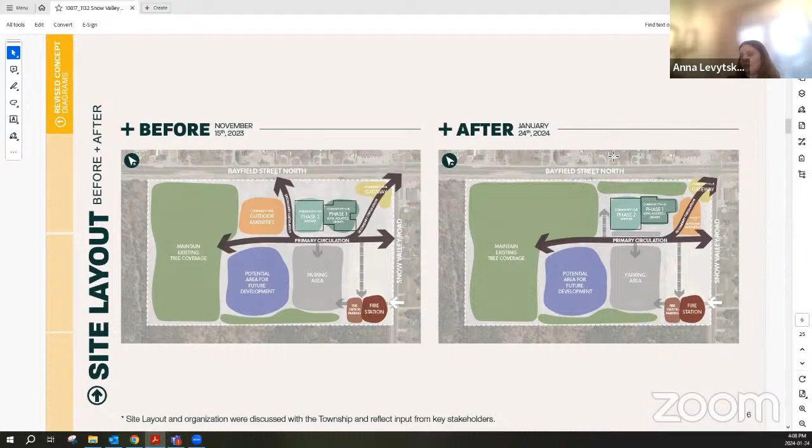Now focusing in a bit more on the building itself. The previous design is on the left again, and the revised design on the right. There is some shifting of major uses -- you can see the overall building footprint has shrunk a little bit. Of the major uses and facilities within the site, we've located the gym and aquatics now towards the north side of the site, including change rooms between both uses, since last time it was a little bit more disconnected.

This time also focusing the library on the south side, still including the multi-purpose space, and then relocating the cafe more towards the periphery, so there is potential access from the street level, from the outside.

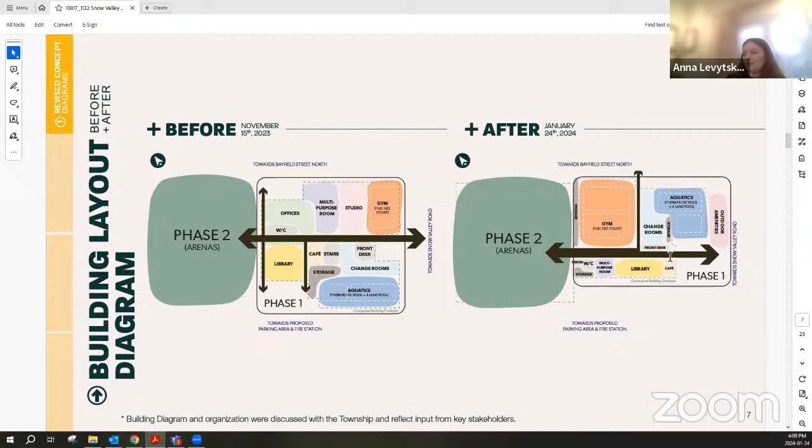Okay, thank you Anna. We thought it would be a good touch point to speak to the potential estimated building costs of the previous scheme and the current scheme. We've kept the same line items for consultants, contingency, the splash pad, and the outdoor amenities.

But we've identified potential savings in the building costs for phase one especially. In the previous version, it was just over 87,000 square feet for phase one, but due to efficiencies in the detail, we were able to reduce that by just under 15,000 square feet, resulting in significant savings from over $64 million down to $53 million proposed.

And if you wrap that back up with all of the consultant fees and everything else, there is just over an $11 million saving on that.

So on phase 2A and 2B, the arenas and rinks, we did increase the size slightly to incorporate extra mechanical room and Zamboni storage and items like that. But the quantity of that space will be detailed by the mechanical engineering team in the future to really understand exactly what the Zamboni needs for interior storage, exterior storage, and all those types of details.

So these are the working numbers that we've tried to do. The benefit of the detailed design is we're able to really drill down on the space configurations of the design itself. Anna, can you go to the next slide please?

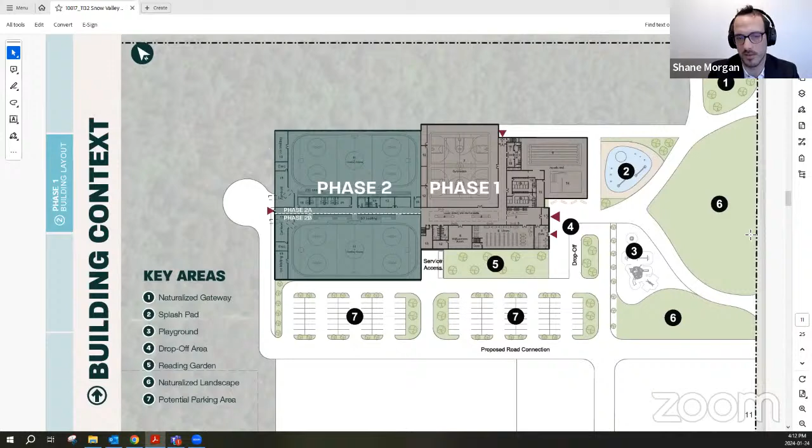So phase 2A would be the larger of the two rinks, with approximately 200 seats, with the change rooms and the access. Phase 2B would be the approximately 50-seater supporting arena on the south side. All of the change rooms and supporting services would be built as part of phase 2A, and that would be able to tie on afterwards.

Next slide please. So to get a bit more of the zoomed-in details that I'm speaking to, we've really worked to tighten up each of those. The next slides will speak to the various areas and costs broken down by grouping.

I know those preferences from councillors to really get into the details on the sizing and cost allocation to each of those services. So as you can see, the number 1 beside the word legend would be that main access point, closer to the parking, closer to the intersection as you come in.

And then you walk in, there's the reception, and off of that is the cafe and library. The cafe has the exterior facing area as well. Depending on hours and services, there's the opportunity for that to operate separately, depending on the requirements that would be there.

The library was maintained as a 2-story structure, so there is an internal stairwell in the library to provide contained access in there, and obviously various services.

Going east to west, there's the multi-purpose room, washrooms, and services space, then the local history and memorabilia. Above that there is a walkway around it, but it'd be a skylight above that to show the very generous space with lots of light.

And then the north-south access would provide access to the gymnasium, the change rooms for both the gymnasium and independent change rooms for the aquatics hall, and then that would spill through. Next slide, please.

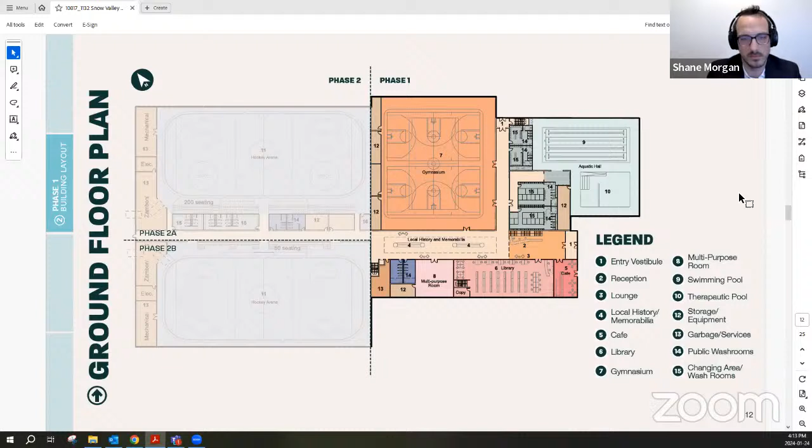And then this is the mezzanine space. So the cafe, aquatics, the first entranceway of the lobby, and the gymnasium are all double height spaces along with the arenas. So everything that is colored is effectively what is usable space on the mezzanine.

So the purple area in the top right is the proposed office area for staff in the facility to work on that. Obviously open to discuss the exact requirements with staff on how many they anticipate, with supporting mechanical for the aquatics.

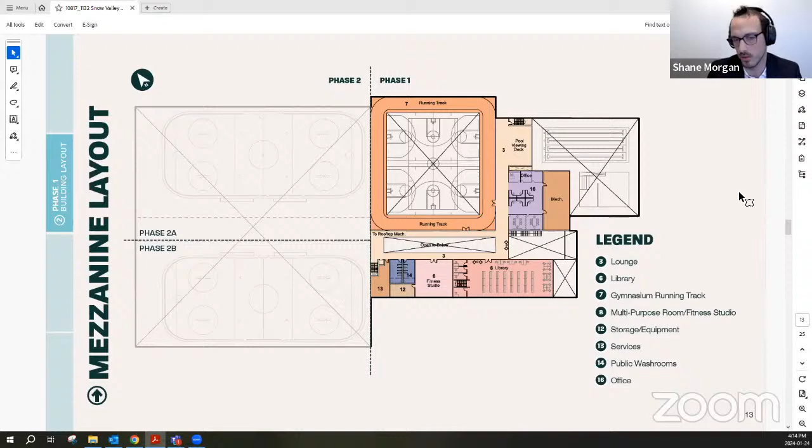Then there is a running track that would be on the mezzanine level above the gymnasium, but obviously not interfering with the clear height space required for the sports facility itself. And then on the south side, the second level of the library with some reading rooms, fitness studio, then the storage, washrooms and services along with that as well.

Next slide, please. So the aquatic hall is the 4-lane, 25 meters with the separate therapeutic pool. So the number is 15 in the bottom left, and the 14. So there's showers, change rooms, storage lockers and everything. So you come in, change there, go through the showers, and service that hall.

So the estimated size of the aquatics facility is just over 13,000 square feet, which would be based on our $740 per square foot valuation, would be $9.6 million. And then the programming breakdown of the aquatics hall itself would be 6.8 for the hall, change rooms and bathrooms 1.8, and then storage equipment 446,000, circulation 509,000 to supplement that.

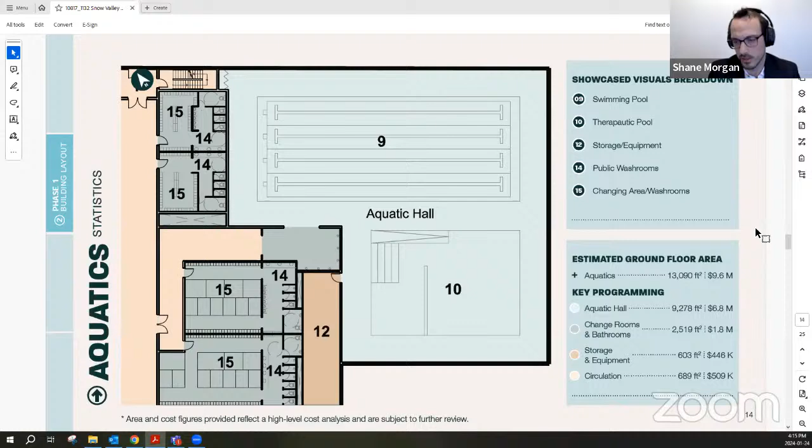Next slide, please. These were just some of the precedents that we utilized in some of the previous examples, just for reference.

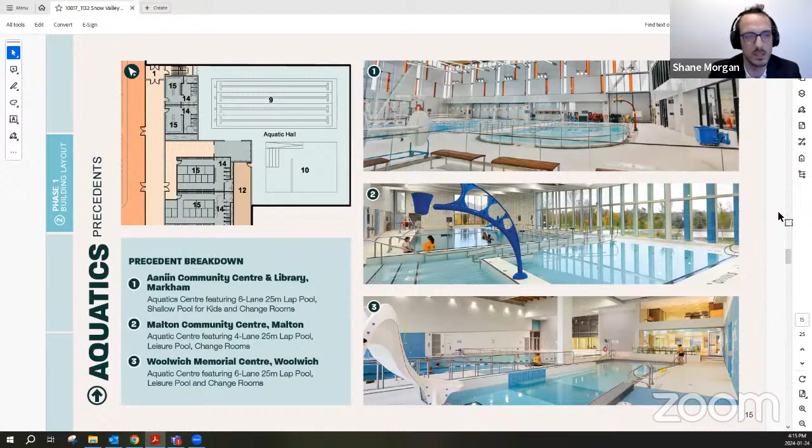Next slide, please. And then the gymnasium. Once again, so the total area of this facility would be 18,665 square feet, bringing the valuation to 13.8 million. So that has, and then the running track on top of the perimeter.

So on the west side here, where number 12 is, that is inset storage, obviously the various needs of a gymnasium for, be it balls or whatever else is going to be handled here, with the running track inset above that.

Supplemental cost there of 5.6, and then the court area, change rooms and washrooms. So in the top right of this image, the 15 and 14 there, the supplemental change rooms for the gymnasium, and then we have obviously the storage on the western side.

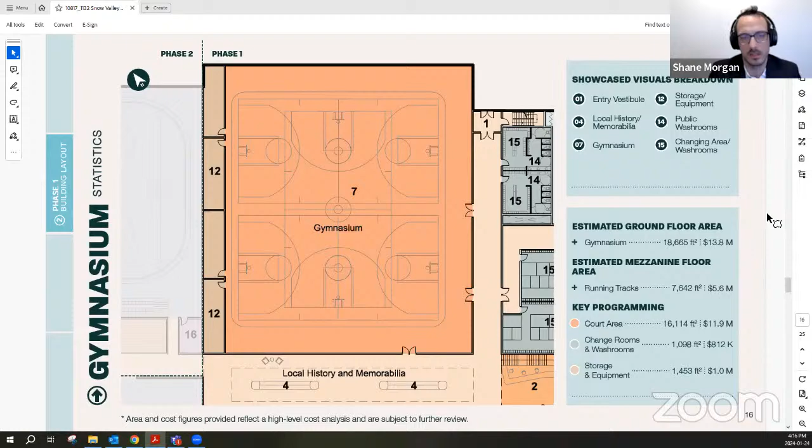Next slide, please. Let's get the various precedents of that, and then the final grouping. So, and then focusing just on the reception, cafe, library. So as you can see, you enter number 1, cafe is over there, and then the reception and local history, memorabilia, and library and multi-purpose.

So this one obviously showcases primarily the library would be just over 8,000 square feet, with a combined cost of 2.9 million essentially per floor, since it is duplicated on both. So that would be the 5.8 million on that.

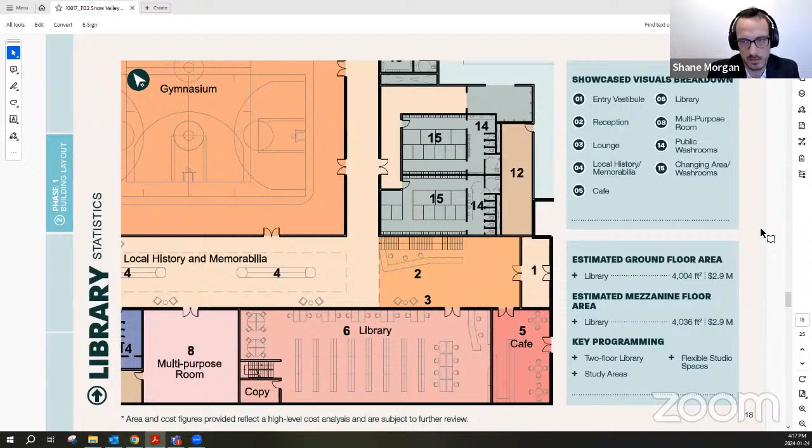So next slide, please. Once again, the various precedents of the kind of library style and kind of facilities that we would envisage there.

And then so onto the arena. So obviously in the central area, you've got the circulation space spilling out from that main circulation. So variety of change rooms, team rooms, public washrooms to supplement. They could be modified to more changing rooms if necessary. There's some storage and equipment, and an office if necessary.

So the full feasibility breakdown of those we'd anticipate we'd go through a needs assessment at a future phase, but this is the kind of supporting bar in that central space to allow access then from there into both of the arenas, with mechanical, electrical, and Zamboni storage on the west side.

So the phase 2A, so there's a dashed line along the corridor in the center. Thank you, Anna. Which would be the demising line, which would mean the total area given over to phase 2A would be 33,357 square feet.

For a total cost of 24.6 million, and then the phase 2B obviously would be a smaller arena, and you have the benefit of not needing to build additional circulation space due to the layout. So that would come in at 25,984 square feet with 19.2 million, and then just the kind of separate breakdown of per use on each of those.

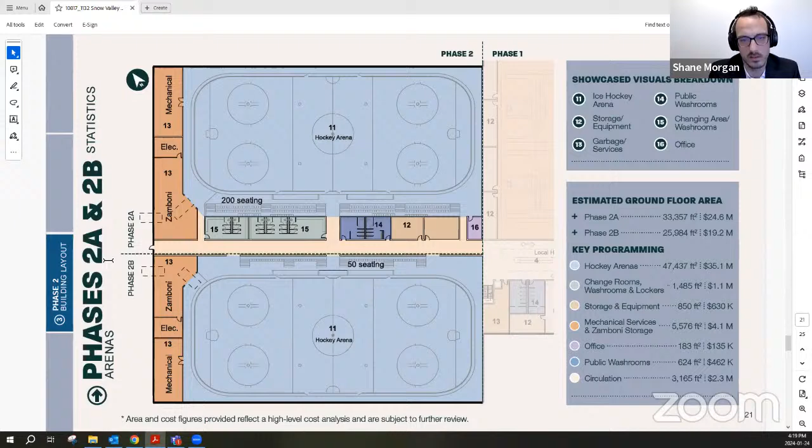So next slide, please. Once again, just back to the precedents for each of those. Next slide, please.

Our hope here is that we can discuss the revised advanced design and answer any questions. Understanding the previous meeting, we wanted to tighten up certain areas and assess the space allocation and ultimate budget associated to those. We're happy to go through the details, and if this aligns with council's expectation and vision, or if there's further modifications to be made to the design.